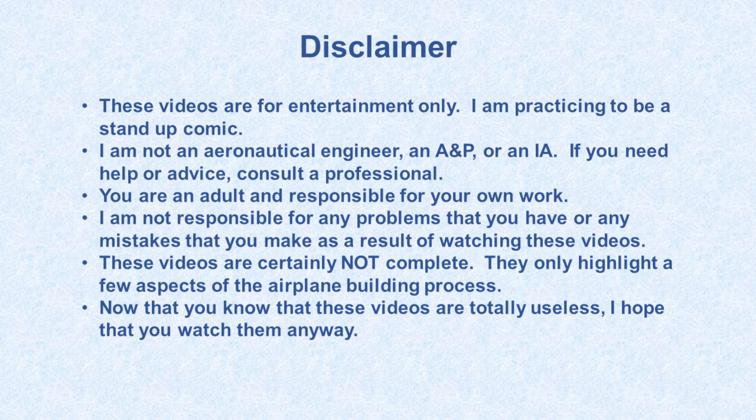Okay, today's topic is smoothing, deburring, and or polishing aluminum edges.

In the last video, we cut some aluminum, and some of the saws left a pretty rough edge, and some of them left a really large burr. So this video is about how to clean those edges up. I think this video might be fairly long, but I think you're going to find it fairly interesting, so try and hang in there.

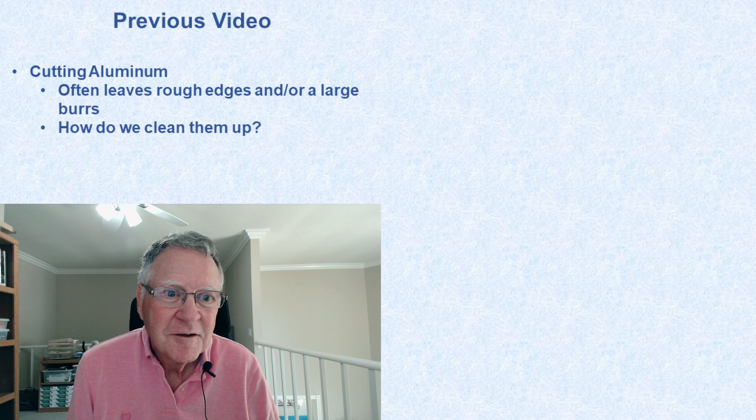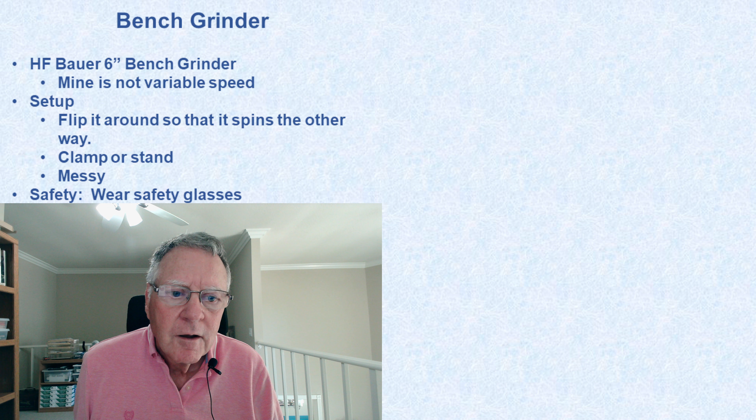Okay, the first thing is the bench grinder. This is the bench grinder that I have. There's nothing great about it, it's just a bench grinder. It's fairly inexpensive, there's probably lots of people selling bench grinders. The one feature that it doesn't have, which I would kind of like to have, is it's not variable speed.

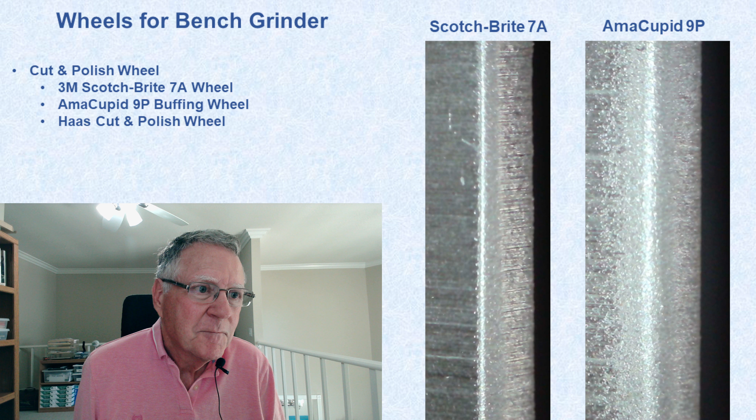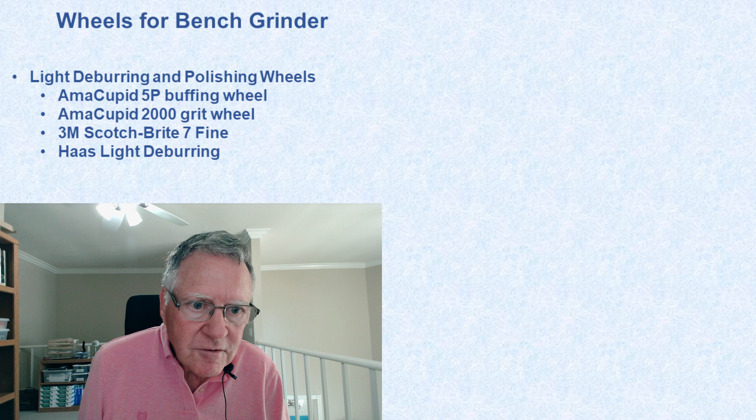I forgot to... let me go back. I think I forgot to show you this wheel. This is the AmaCupid 9P. It's only $16, and it's available on Amazon.

And this is the 5P, and it's even cheaper—it has a density of 5 instead of a density of 9. So when it's new, it's not too bad, but after you use it for a while, it gets very frayed around the edges. And like I said, it really starts polishing into the surface as well as the edge of your sample.

Okay, this wheel is fairly new, at least on Amazon. It's another AmaCupid wheel, a little bit different. This one is advertised as a 2000 grit wheel, so that's a very fine grit. It's basically a polishing wheel, and this is not a fiber wheel.

But as it is, I'd rate it as okay, but not great. I wouldn't go out of my way for this wheel. Okay, that's it for the bench grinder. Let's go on to the belt sander.

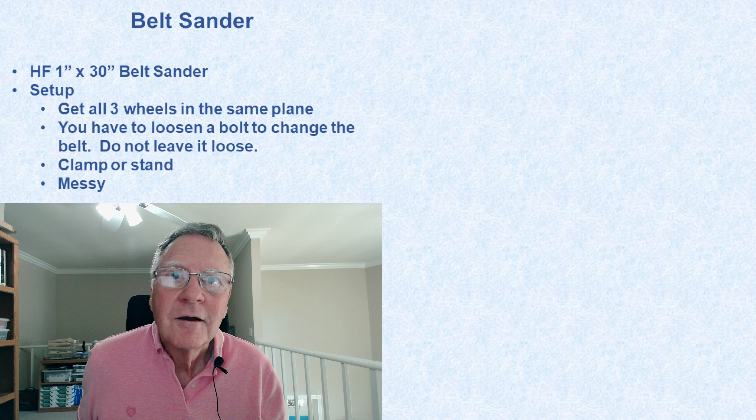Okay, this is the one that I have, Harbor Freight, their Central Machinery brand. It's only a 1-inch wide belt, 30-inch long belt. I got it on sale. Even when it's not on sale, it's not all that expensive—it's only $50. And if you get it on sale, it's an even better deal. You can probably get it for like $35 on sale.

I kind of bought it on a whim, but it's turned out to be pretty useful, and I like it and use it regularly. So I would recommend it, especially for the price. This tool is less expensive than just one of the wheels we were just looking at, one of the good ones, like the Scotch-Brite 7A wheel.

It's another one of these things that if you have room for it, if you have a place in your garage, I would recommend it. In terms of setup, I messed with mine a little bit, and I can't say I really got it any better than the way it was when it came.

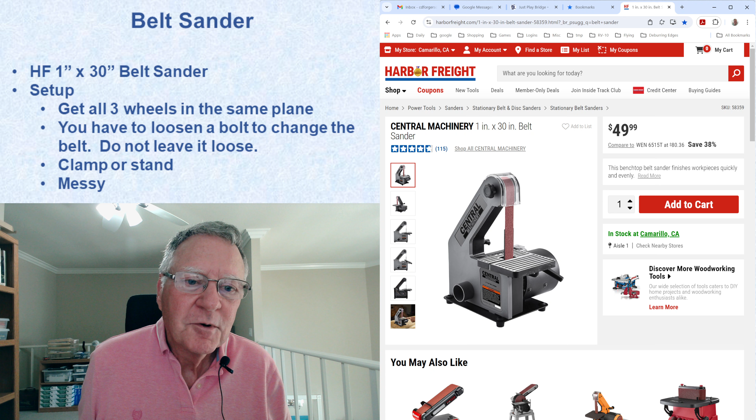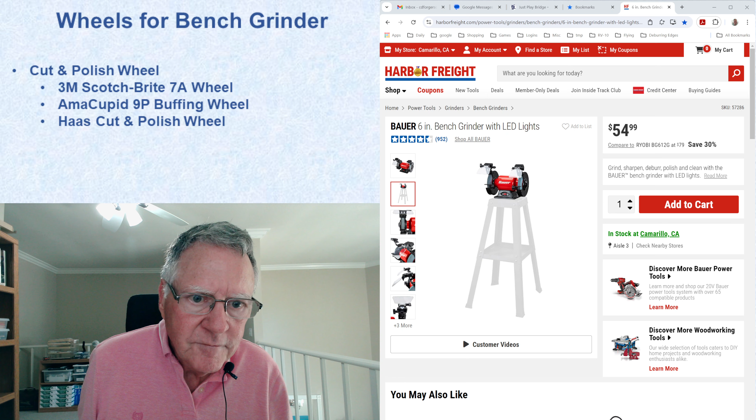Okay, let's go back to the belt sander. Sorry about that, I got things out of order there. Oops, too far.

Okay, I want to talk about the belts for the belt sander. Unless you know what you want, I would recommend something like this. This is a 24-pack of 1x30 belts, with 4 belts each at 120 grit, 240 grit, 400 grit, 600 grit, 800 grit, and 1000 grit. That should pretty much cover it.

Now, Harbor Freight's standard belts are coarser. Here's the standard Warrior belts. They come in either 80 grit or 120 grit, and they also have these Zirconia belts, which I think are a little bit better belts, but these are even coarser, coming in 40 and 80 grit. So if you want a belt for really just removing fairly large amounts of metal, you could get something like that, but I would definitely recommend a finer belt.

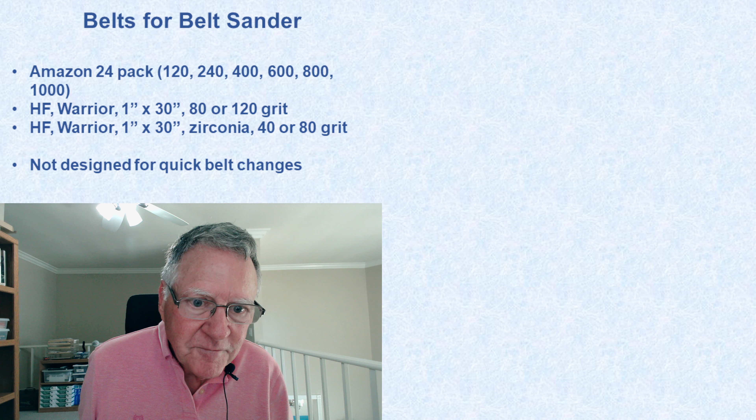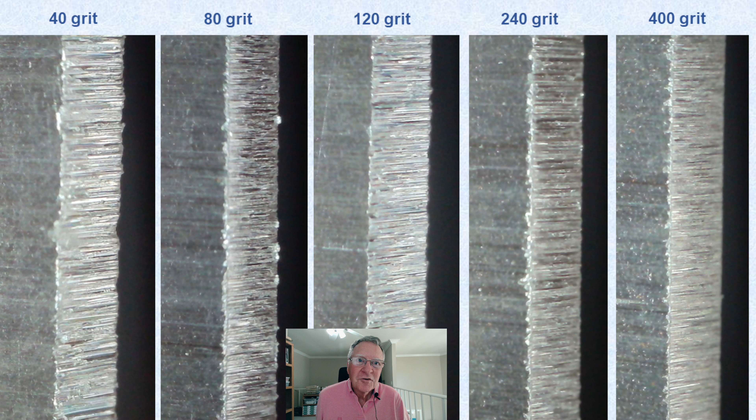On the left we have a 40 grit belt, and it is very rough. You're not going to be improving anything from your saw if you're using a 40 grit belt. It's going to be as rough or rougher than what was left by your saw. So if you want something for just removing lots of metal, that would be a way to do it. But you're going to want to follow it up with something to smooth off the edge.

The 80 grit belt is significantly better, but it also leaves a pretty rough edge. As you can see, as the grit size goes up, 120 is in the middle, 240 is next to that, and 400 grit is on the far right.

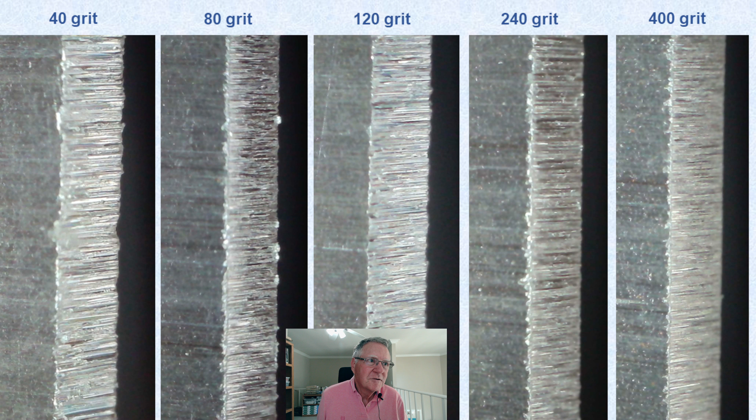When you get to 400 grit, things are starting to look pretty good. It definitely is going to be improving things significantly over some of the saws, definitely over the bandsaw. This is way better than the edge that the bandsaw was leaving. Go on to the next slide, and you can see even finer grits.

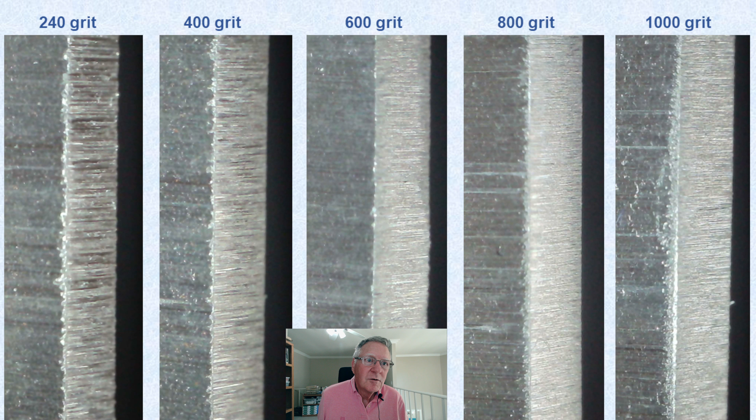We've already seen the 240 and the 400. The middle one here is 600 grit, and we're starting to get a fairly smooth edge. Next one is 800 grit, and the last one is 1,000 grit.

Oops, sorry, grabbed the wrong one. Okay, sorry about that. All right, it's time to go on to the die grinder.

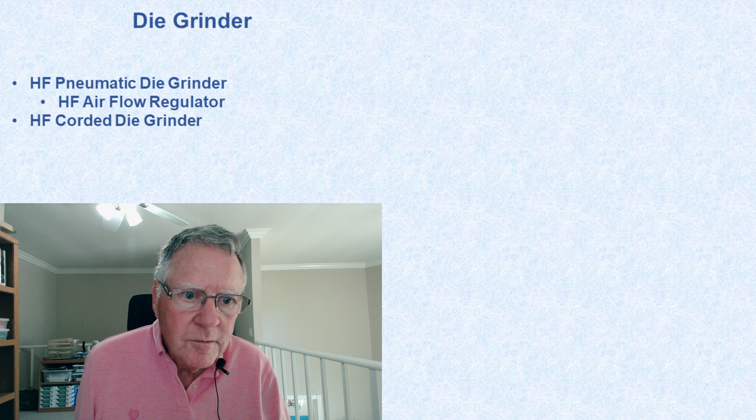This is the die grinder that I have. It's a pneumatic die grinder, pretty inexpensive, sold by Harbor Freight. Works pretty well, I don't have any complaints. The only complaint I guess I have about it is it uses a lot of air, so your air compressor is going to be running pretty continuously if you're using this for more than 10 or 15 seconds probably.

Very simple. And if you want more of an actual regulator, they sell those too. They're about the same price. The cheap one is about the same price. The one that's a little bit better, I think it's called the Merlin, and it's more like $20 or thereabouts, maybe 25.

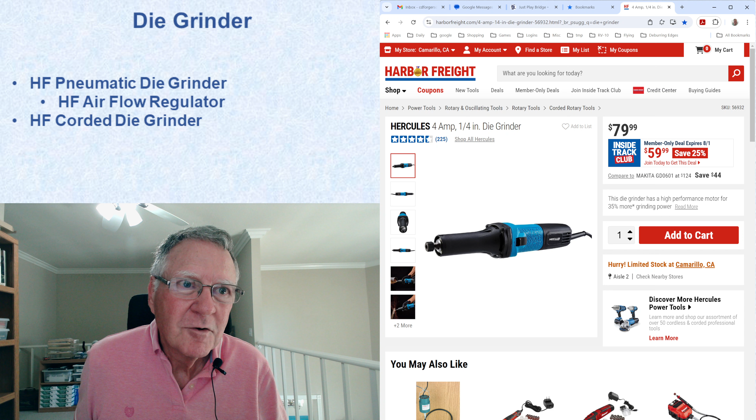The disadvantage that I see of this tool is it's not variable speed. I looked around briefly for a variable speed corded die grinder, and I didn't find one right off. But if you're considering buying one, look around some more and see if you can find one that's variable speed. Also, they can get a lot more expensive than this, up in the $200 to $300 range. If you're going to use it a lot, I don't think you're going to be using it all that much for building an airplane, but if you have some other use for it, it might be a reasonable way to go.

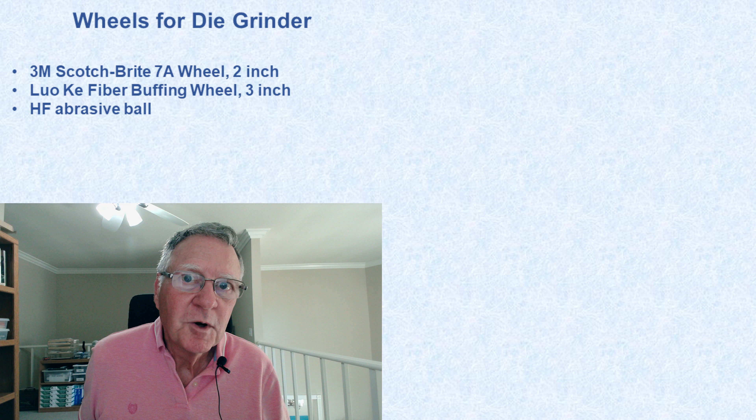So what kind of wheels do you use for your die grinder? Cleveland Aircraft sells a smaller version of the 7A, the Scotch-Brite 7A. This is the 2-inch version of the Scotch-Brite 7A wheel. It's the same wheel, just smaller. Also, I think it has a 1/4 inch arbor, I'm sure it says here.

Be careful, you're going to need a mandrel for it, sold separately. So here it is: for 2-inch wheels, use 1/4 inch mandrel, 3M 140. Or you can find some sort of mandrel that you can make work at Harbor Freight or Home Depot probably. Again, it's an excellent wheel, it's just that the 3M wheels tend to be a little more expensive. So it's not that expensive, but it is kind of expensive for a 2-inch wheel.

Here's some 3-inch wheels sold on Amazon, and you get 5 for $10, so they're only $2 a piece. They're a little bit bigger. They're not as hard. They're not going to last as long as that Scotch-Brite 7A, but then again, you get 5 of them. So I have some, and we'll look at the micrographs for both of them.

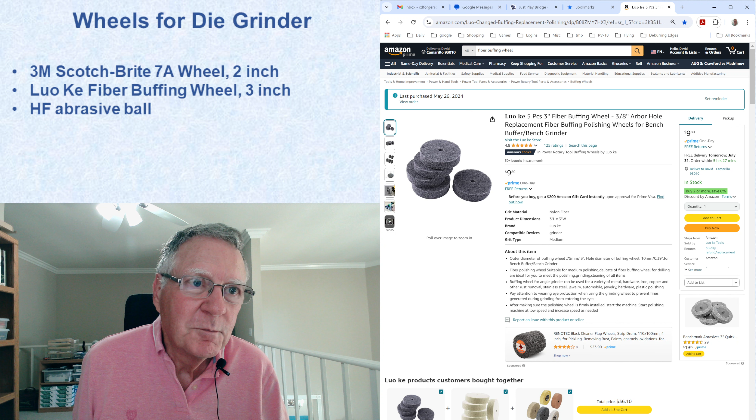And one other thing you might want to consider for a die grinder is this abrasive ball sold by Harbor Freight. I'm going to talk about this more when we get to the other tools section, but it does go in a die grinder, so I don't know if it really belongs here or in the other tools section coming up. But I wanted to just go ahead and mention it real quick.

Okay, this is the Scotch-Brite 7A on the left and the Luo Ke on the right. With a pressure regulator, you can control the speed. These two pictures here were taken using 50 psi on the die grinder. Both of them are doing okay, both of them are rounding the corner and polishing a little bit into the surface as well as the edge, but they are smoothing things up significantly.

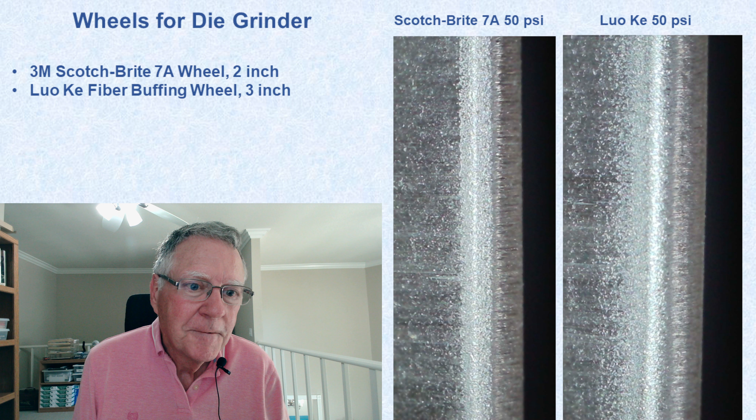Okay, there are some other tools, so we're moving on to them.

There's a deburring blade sold by Cleveland Aircraft Tools. It's a V-shaped blade, so usually I just call this the V-tool, but I'm probably the only one in the world that does that. You just run this along the edge of the metal, and it takes off a little on each corner—not a lot, just a little bit. The sharper the edge or corner, the higher the stress.

If you have a really sharp edge, the stress is much higher, and that can affect the fatigue life of your part. So in addition to just smoothing things out, which is pretty much what we've been talking about so far, you want to round things off. This helps round things off a little bit, but it doesn't do anything at all in terms of smoothing things out.

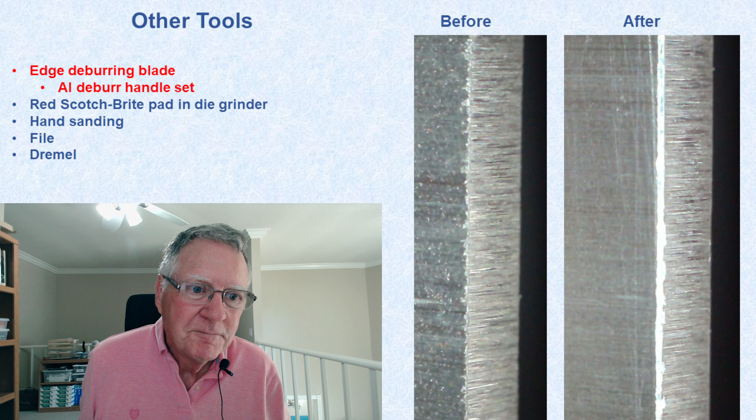Okay, I already talked briefly about this red Scotch-Brite ball that Harbor Freight sells.

I guess they call it their Abrasive Ball, and it comes in 3 different grit sizes. The one I have is the 80 grit size. It also comes in 180, which I think is a lighter red color, and then the 400, which is kind of a dark gray color.

Next time they're having a sale, I think I'm going to pick up the 180 and the 400 as well.

Now, you do not have to use them in the shape of a ball. The way it's built, this is just a mandrel, so you can just unscrew it, and it has about 10 round pieces of Scotch-Brite pad. So I just took it apart, and you just put 1 or 2 pieces in, and then you have a motorized pad of Scotch-Brite.

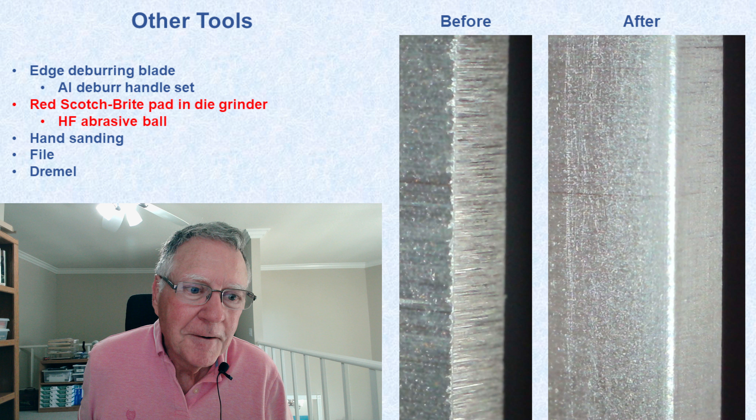Okay, the next thing on the other tools list is just sandpaper. Everybody knows what sandpaper looks like, and everybody sells sandpaper. You can go buy it wherever you want—Home Depot, Harbor Freight, Amazon—everybody sells sandpaper.

So this is the sample. I just sanded this by hand, and on the left is 220 grit paper, and on the right is 400 grit. It does a pretty decent job. Again, I was kind of surprised at how well it did.

It's a fairly reasonable way to go, especially for something that's kind of hard to get to, like a lightening hole. You can pretty easily get a piece of sandpaper into a lightening hole and sand it up by hand fairly quickly, whereas it's hard to get a power tool in something like that.

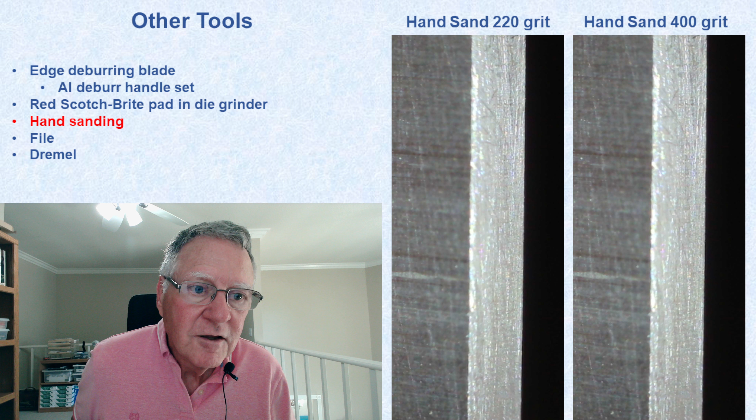And the next thing on the list is a file. Again, it did better than I was expecting. It does leave a pretty rough edge, but it could have been worse.

Okay, the file on the left is the Cleveland Aircraft file, and it's a pretty expensive file, but it is a very nice file—it's 32 bucks. This is it in the picture here. The file on the right is just a cheap file from Harbor Freight, like a $3 file or something.

The disadvantage of the Harbor Freight file is, I've probably only had it about a year, and it's starting to rust a fair amount, whereas the Cleveland Aircraft tool file looks brand new. So if you just want something that'll last you a couple years and then you can throw away, get a cheap file. If you want something for a lifetime, you can buy a better file.

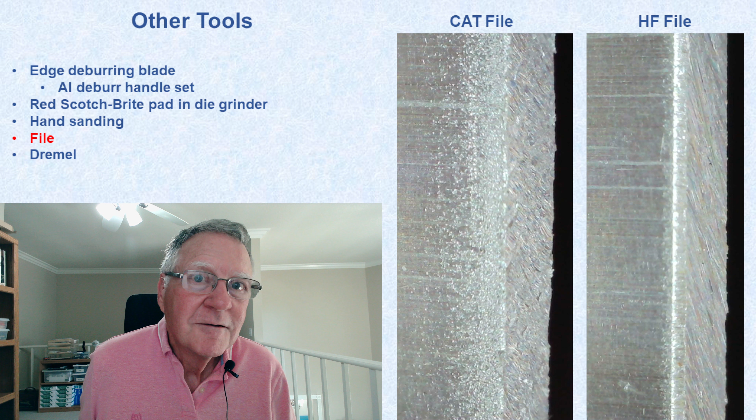And the last thing on the other tools list is a Dremel. I don't have it listed here, but everybody knows what a Dremel looks like. The problem is Dremel tools are made for pretty small applications. All of the polishing wheels and things like that are very small, and I haven't found anything that I like very well or that I use.

So I'm just mentioning it. If you have a Dremel, you might see what you can do, but I haven't found it to be all that useful.

Okay, so there's a trade-off to be had here on aggressiveness versus smoothness. The obvious example is the sandpaper and the belt sander. You use the coarse grit sandpaper, and it's very rough, not smooth at all, but it removes material very well. And if you use the fine grit sandpaper, it gives you a nice smooth edge, but it'll take you forever to remove any material.

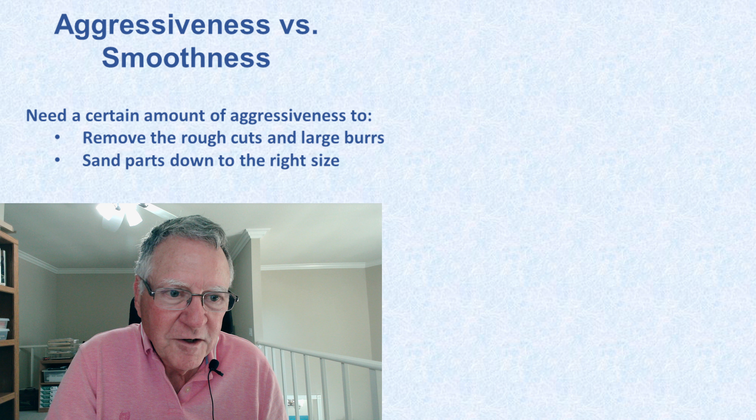So I decided to try and quantify this a little bit. I took some regular Vans aluminum, 2024 T3 aluminum alloy, 16 thousandths thick, and sanded down or ground down the corner for 10 seconds, then measured the length of the corner, as you can see in the picture here, to see how much got removed.

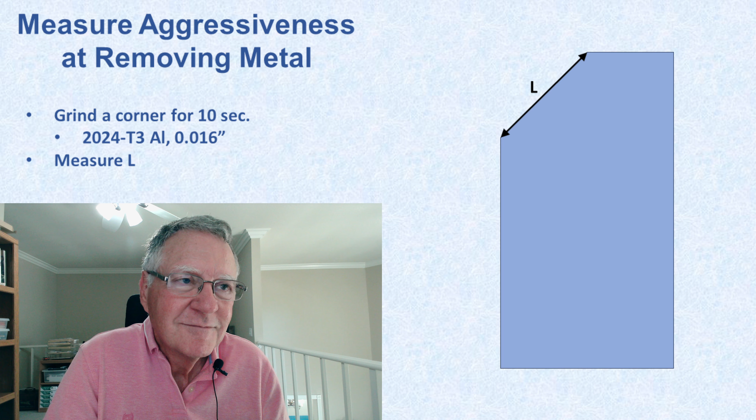The AmaCupid 2000 grit I did not test, because it looked to me like putting the corner of the aluminum sample up against that wheel was going to dig a significant groove into the wheel. It was just going to cut right into it. Now, I didn't actually do it, so I don't know for sure, but I would not recommend that wheel for removing material.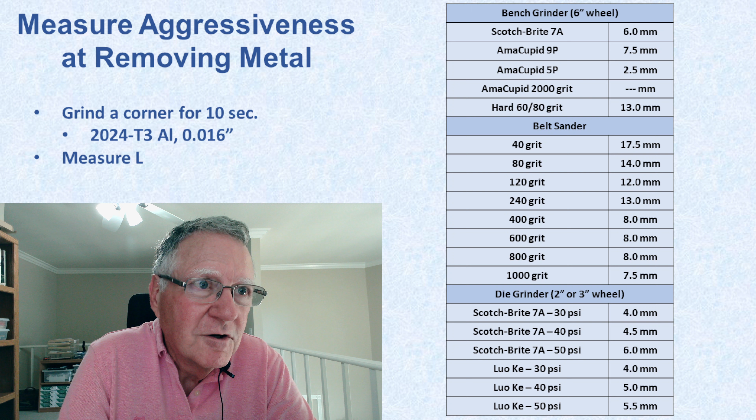And I took just a hard stone wheel. It was a Harbor Freight wheel, labeled as a 60/80 grit wheel. That was very aggressive. So if you need to remove lots of metal, you can do it with something like that. But as we're going to see, it leaves a very rough edge.

Then for the belt sander, 40 grit is very aggressive—even more aggressive than the hard wheel on the bench grinder. That's up at 17.5 millimeters. They pretty much progressively decrease as you go to the higher grit sizes, up to 1,000 grit. Even the 1,000 grit on the belt sander was more aggressive than the Scotch-Brite 7A wheel on the bench grinder. It was about the same as the 9P wheel.

These didn't come out exactly in order. For example, it looks like the 240 grit was more aggressive than the 120 grit, but the samples were getting hot, so I suspect the 120 grit didn't get the full 10 seconds, and that's why it's only 12 millimeters. I guess I could have gone back and repeated the test, but it's not that big a deal.

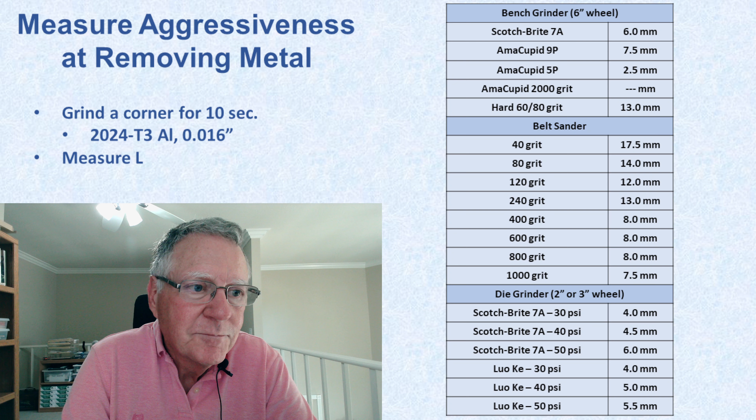In terms of the die grinder, you can adjust the speed by adjusting the pressure. At 30 psi, both wheels—the Scotch-Brite wheel and the Luo Ke wheel—left a 4 millimeter corner. As you turn the speed up, the Scotch-Brite goes from 4 to 4.5 to 6 millimeters at 50 psi. And the Luo Ke goes 4 to 5 to 5.5 as you turn the pressure up.

So here I sorted things by aggressiveness. The three at the top—the 40 grit belt sander, the 80 grit on the belt sander, and the hard wheel—those are for removing metal only. You're going to have to come back with something else to smooth them out. So if you want to remove a lot of metal and don't care what kind of edge it leaves, you could consider something like that.

The ones in red, those are more in what you'd probably call cutting tools. They're for removal, but they don't leave that bad of an edge. In particular, you can go up to the 600 and 800 grit sandpaper and still remove a fair amount of metal and leave a pretty decent edge.

And the ones in yellow are the ones I would characterize as cut and polish. They still remove a little bit of material, but they smooth up the edge significantly, especially if you start off with a really bad edge like the bandsaw leaves. I've already talked about how the Scotch-Brite 7A wheel is kind of the gold standard, and so that one is up in the top half of the yellow ones here.

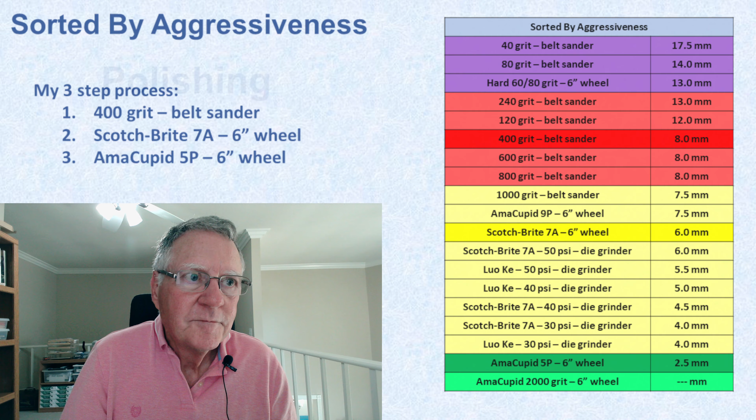The pictures we've seen so far were primarily in the cut and polish, or just the cutting category. So I wanted to look at polishing a little more. What I did was use these polishing tools or cut and polishing tools on the surface of the aluminum in order to try and get a better picture than just trying to photograph the edge.

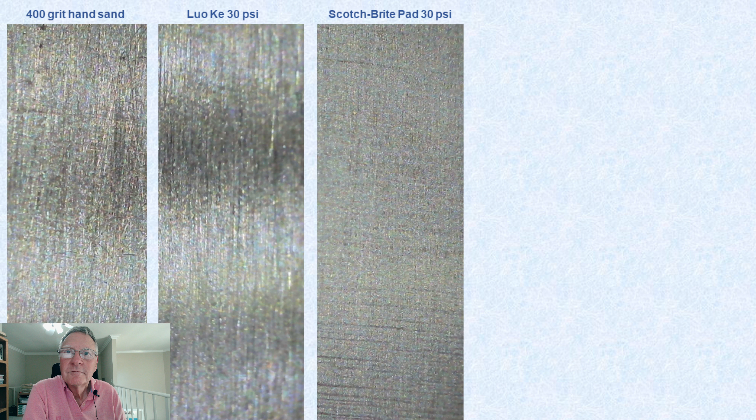Again, the one on the far left is just the 400 grit hand sandpaper. The one in the middle here is the die grinder with the Luo Ke wheel at 30 psi. It's smoothing things out, not great, but a little bit. Then the Scotch-Brite pad at 30 psi is doing a pretty good job of smoothing things out. Again, the marks you're seeing in particular down at the bottom there are marks that were there previously, so it's not aggressive enough to remove those marks. But it is doing a pretty good job of polishing.

As I've already mentioned, I was interested in a three-step approach, where step one was to remove any material necessary, step two was a cut and polish, and step three was more of just a polish.

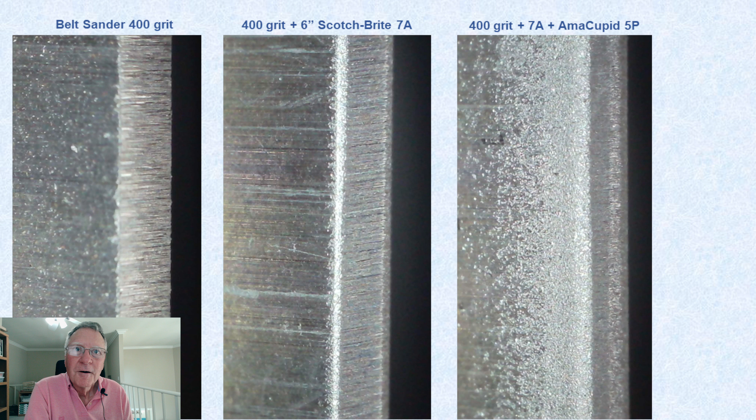So step one is the belt sander at 400 grit. Before I took all these pictures, I had an 80 grit belt in the belt sander. I decided I didn't really need that much removal, and I could get significantly better edges by going to a finer grit. So I've since changed my belt sander from being semi-permanently set up at 80 grit to being semi-permanently set up at 400 grit.

Then followed by the Scotch-Brite 7A wheel, 6-inch wheel, that's the picture in the center here. And then that's followed by the AmaCupid 5P polishing wheel, which gives a pretty smooth, rounded edge. The only disadvantage is that it is attacking the aluminum on the surface a little bit, so it might remove some of the aluminum cladding.

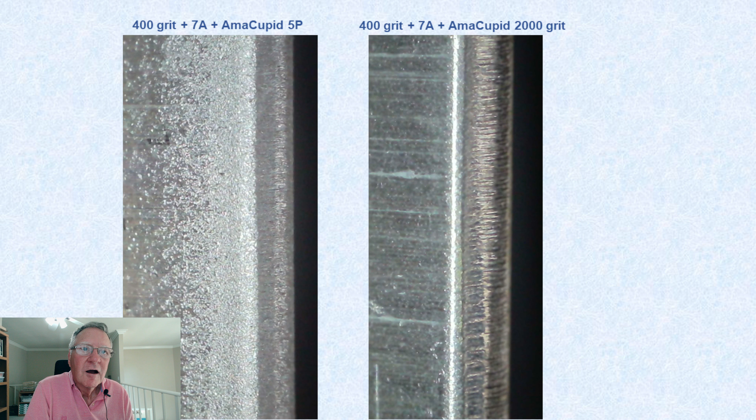Here's the two side by side. This is the three-step with 5P as the last step on the left, and on the right we have the last step as the AmaCupid 2000 grit.